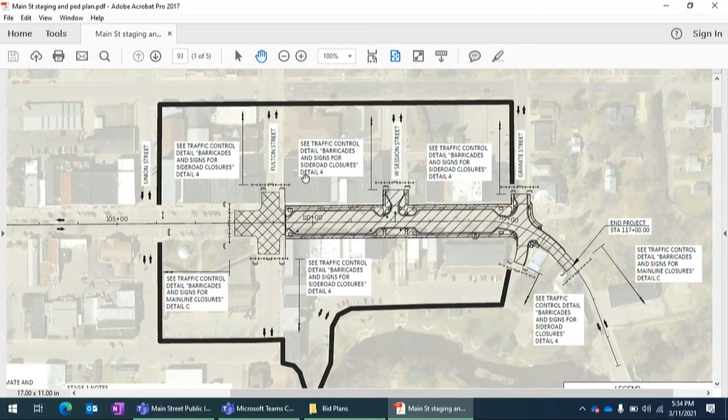Our goal is to have that north side of the project finished up around the middle of July. And then at that point, we would get into the second stage, the south stage of the project.

All these gentlemen will be heavily involved with this project and all the work that goes on with it. Their contact information will be put on the City of Waupaca website. For roadway items, issues, and sidewalks, your primary contact will be Blake. For sewer and water, your primary contact will be myself and/or Roger Hansen.

The schedule that Adam just briefly went through will also be put on our website for distribution. If you have comments on specifics, send them our way and we'll answer them the best we can.

This project -- right now Main Street is an asphalt road. When this is done, it's going to be a concrete road. We'll have concrete roadway, concrete curb and gutter, and concrete sidewalk. And with concrete work, it has to be saw cut -- that's how it's done, that's where the joints are. So there'll be a lot of concrete sawing late into the evening.

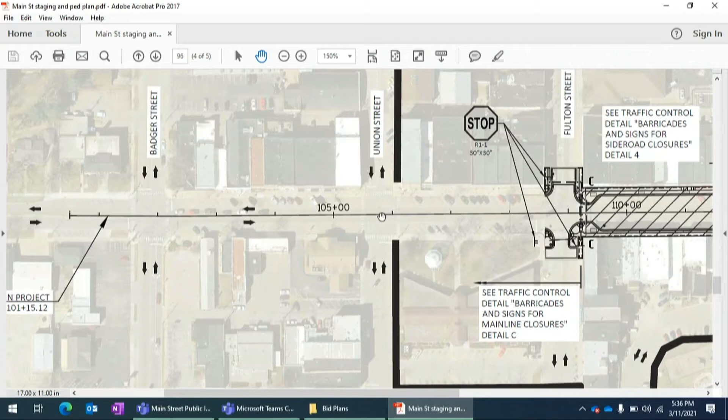One thing to note is the intersection of Fulton Street and Main Street. The traffic signals there will be removed with the project and put into a four-way stop configuration. With the staging of Fulton Street, the signals will initially be put into a red flash, and then eventually those signals will go away and it'll be controlled by just stop signs.

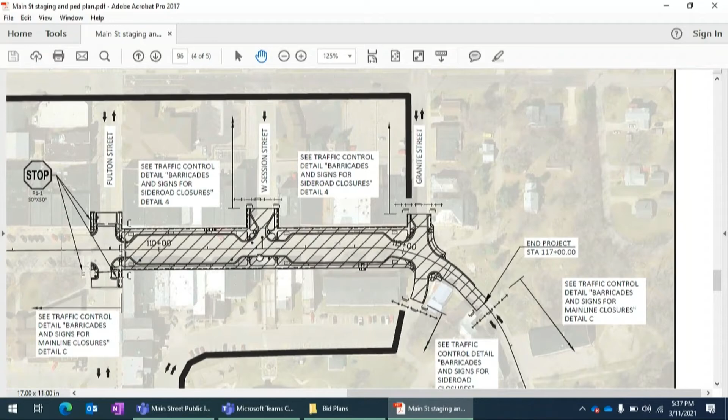The Granite Street intersection, when that is opened up and we switch over to stage 2, that intersection will be a four-way stop sign controlled intersection. So those are all traffic changes that are occurring downtown.

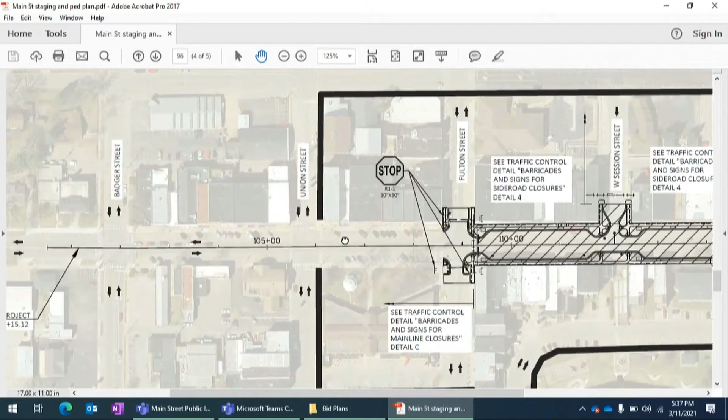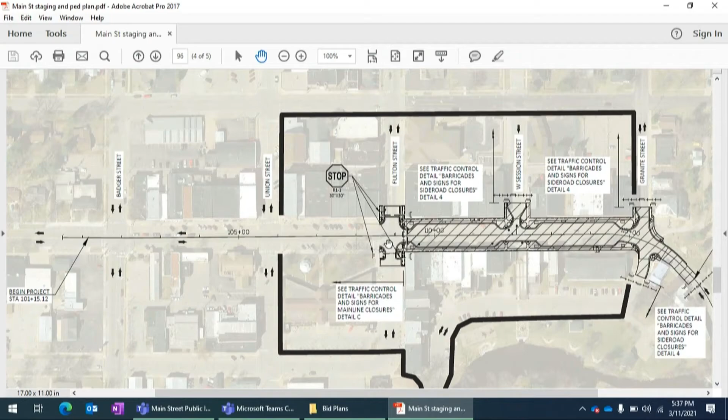The existing street lights out there will be removed early on in the project or de-energized, making it a little bit dark downtown. We are working with WPS to try and get some temporary lighting or to increase the lighting while the existing ones are offline. That's something we're working on and hope to have in place before this project starts.

We will be trying to have another meeting similar to this, probably right before stage 2, which is anticipated to be about mid-July, the stage switch. So a few weeks before that, we'll have a similar meeting to go through the next stage. The amount and type of work in the next stage is similar to this one, but we'll update everybody on where we're at schedule-wise. So you'll be looking for something probably around the 4th of July holiday. We'll get a notification out, but just wanted to make everybody aware there will be another one of these coming.

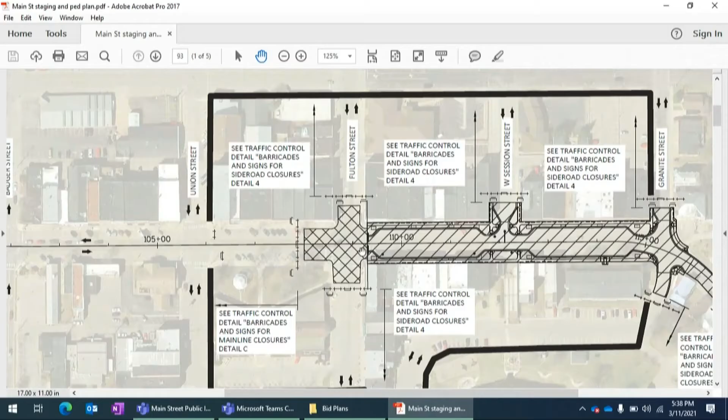Justin, do you want to rehash the timeline we talked about earlier today? The confirmed start date was March 29th. We talked about the Fulton Street intersection being done the first 3 days, then moving north, back to Fulton Street, then back to the south. So starting March 29th, the Fulton Street intersection, this area that's double hashed, will be shut down for 3 days.

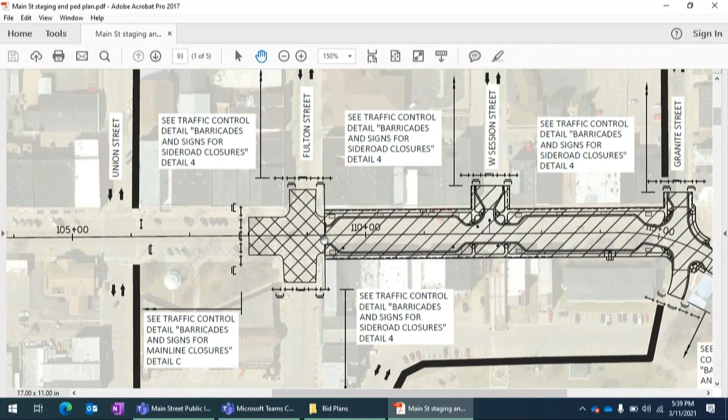Gerke needs to do a little bit of utility work in there before we can switch over and head up north. So this intersection, Fulton and Main, will be completely shut down March 29th, 30th, and 31st. After those 3 days, Fulton Street will reopen with some temporary asphalt, which means it will be a little rougher than usual. Our downtown's a little rough anyway, so it shouldn't be a big deal.

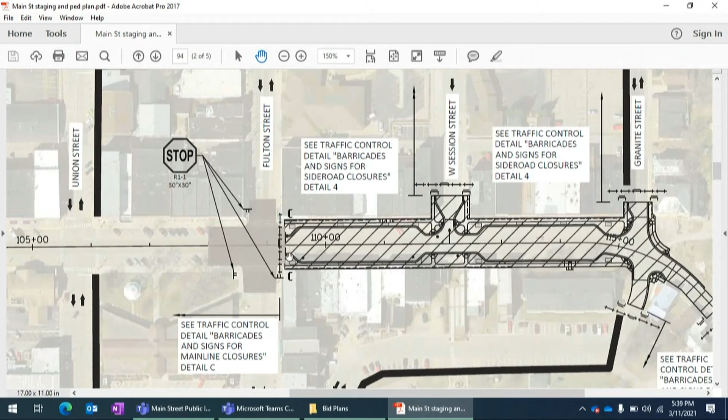But the primary amount of work is going to be north of Fulton Street. It won't be until later, I don't remember the exact date, when we come back to that end of April. Is that correct, Adam? Roughly the middle of May, and then we would close it again.

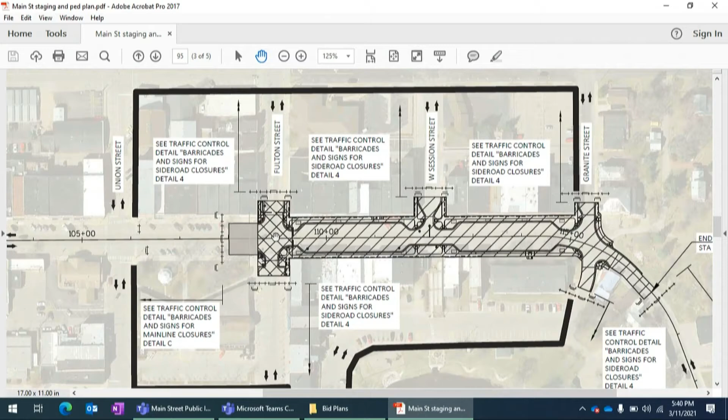Close again like May 17th, and then get it opened up, kind of see how things go on that. So right now we're planning for late April into early May.

The Fulton Street intersection will be shut down fully once again, and that will be to bring all those items back to a brand-new roadway. That's going to take approximately 3 weeks to finish this section, with brand-new curb, brand-new sidewalk, brand-new pavement, and brand-new utilities underneath. 3 weeks to bring that up, then open Fulton Street up and finish our work north of that.

That will continue until mid-July, at which point, as Eric mentioned, we'll do another meeting with more updates. We expect everything north of Fulton Street, including Fulton Street, to be finished by mid-July, and then we'll flip over and start reconstructing south of the Fulton Street intersection down through Badger Street. The Badger Street intersection will be completely closed.

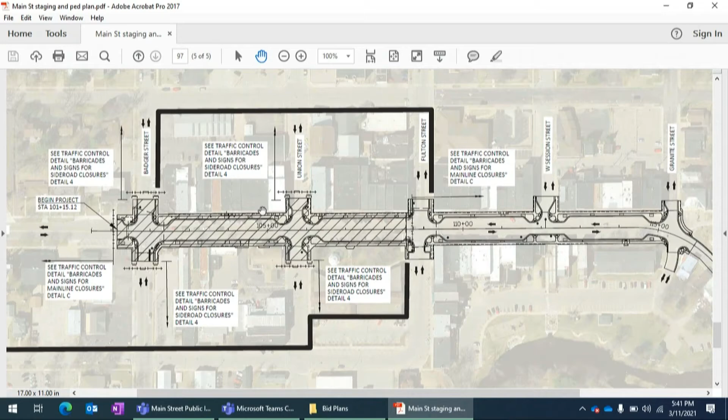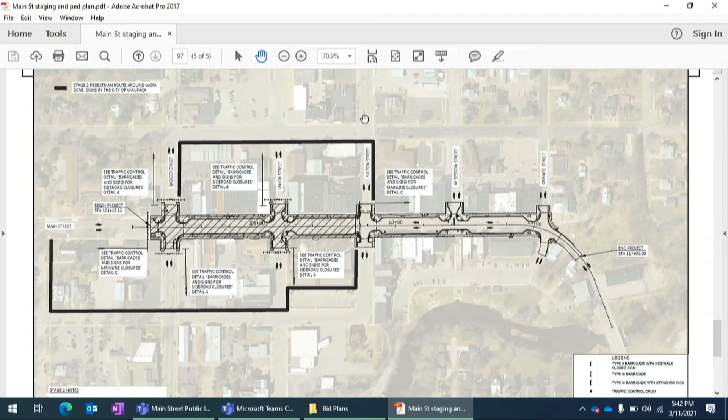The Union Street intersection will be completely closed as well. Traffic around will follow these black lines on our plan sheets, which show the pedestrian route around. Traffic can mainly take Washington Street around in either direction, depending on which stage. That's the primary route for vehicle traffic around, using Washington Street.

Another comment is that right now, this is what the contractor's thinking and how they want to construct this. Weather plays a huge role in this schedule. If we have a good spring without a month's worth of solid rain, things will keep on schedule. We'll keep everybody up to date as we go.

If stuff starts getting delayed due to weather, the city will have to update the schedule as we go. The contractor will be doing that for us anyway, so we'll keep everybody in the loop. But these are what we're shooting for. I want to make everybody aware that weather plays a big role, especially when we start doing concrete paving and underground work. It sounds like the water table is pretty low here, which is a huge benefit to make sure our sewer work can get done in a timely fashion.

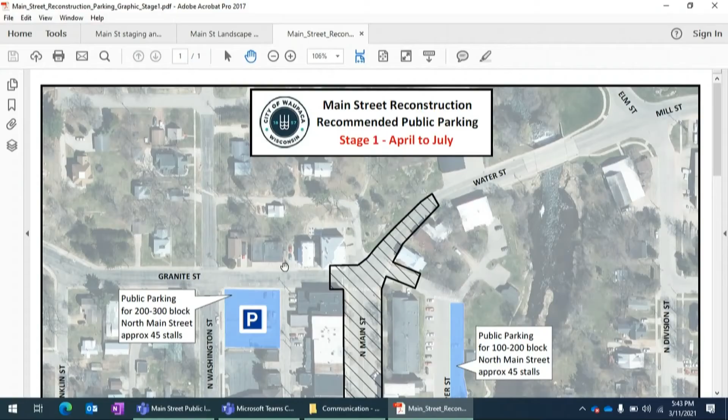So when this is going on, obviously parking on the street will not be allowed. We're going to try and keep pedestrian access there as long as possible. Obviously, there's going to be some elements of the construction that will be difficult for pedestrians to walk through or traverse. The sidewalk we're going to try and maintain as long as we can. When a square of sidewalk gets popped out, it will be replaced with at least temporary gravel.

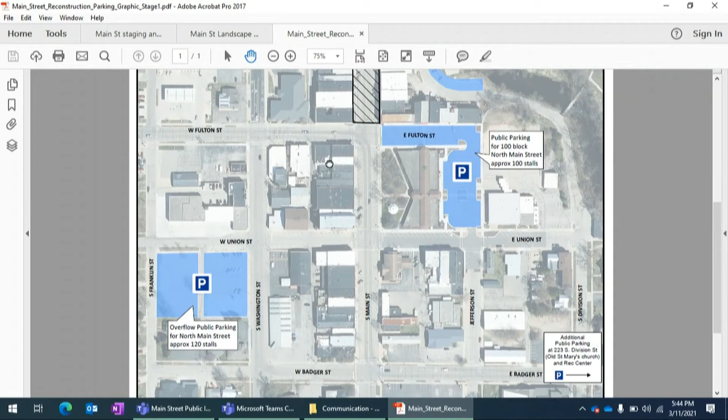With that, we've identified our parking lots that are near the facility. This map here is published on our website as well. We're encouraging people who want to visit North Main Street businesses, or if they live there, to use the Granite Street parking lot. There's also the Cooper Street parking lot on the east side of Main Street. We have the back parking lot behind City Hall, and of course a large parking lot over by the police department.

So for phase one, or stage one, we're recommending using Granite Street and Cooper Street. For stage two, it's flip-flopped: using the parking lot down by the police department and also the parking lot around City Hall.

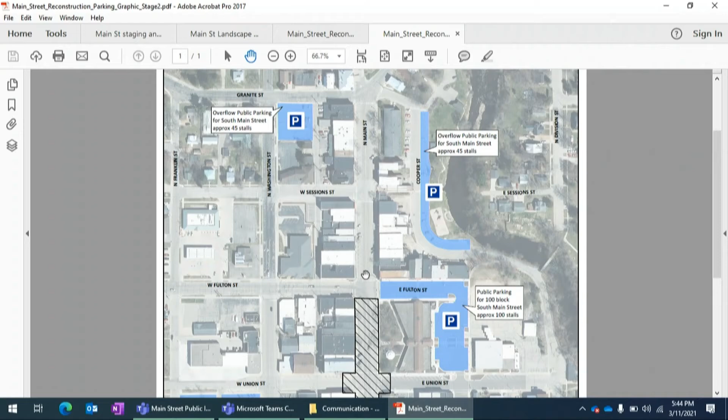Justin, I think you kind of touched on this, but we have a question in the chat: will tenants have access to buildings at all times on Main Street doorways? Can you speak to that more specifically? Not 100%, but we're going to try our best. There'll be times when there's excavation work right in front of that doorway. Maybe Adam, you can expand on that a bit more.

There should be access most of the time. I guess the times I see we might have issues is when we're running the water and sewer laterals, depending on where those enter the building — we might have to open that up.

There'll also be a period when the sidewalks are removed before we get some base back in there, and that might be hard to get in and out for a short time. And then there'll be the pouring of the concrete itself right in front of the door. In the first stage, with that being in June or July, you're talking 5 to 6 hours where you can't walk before you can walk on that concrete again.

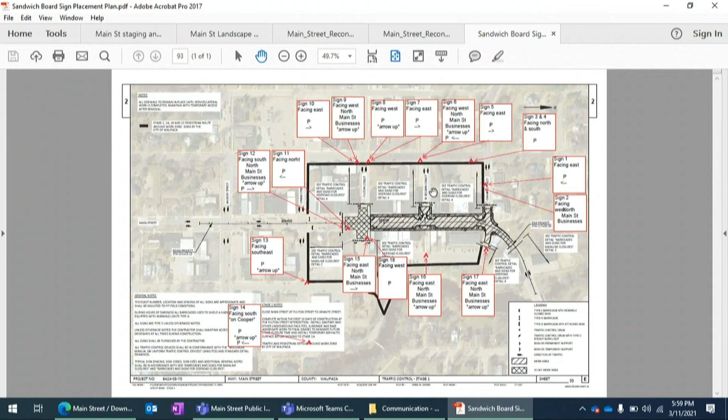We had mentioned this detour route or signage going to and from the businesses. This is something we created, a mixture of the DOT plans plus city plans. This is a little more complicated than what most people need to see, but what it shows is we're going to have these sandwich boards out there with signs that point out which way you should be going, whether you're trying to find a place to park or a place to walk. This is it in a nutshell.

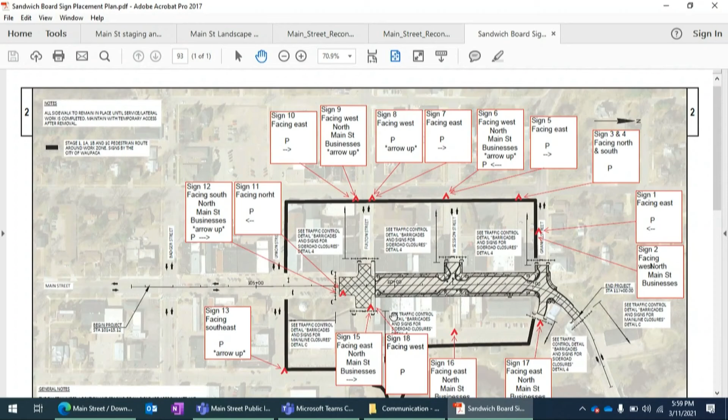Those are the details of that detour and parking around the construction zone. So I do have another question here. Can you please review the 3-week closing of Fulton in May?

The 3-week closing, we're calling stage 1B, right, gentlemen? Correct. Yeah.

We would need to close the Fulton Street intersection again around the middle of May to finish the storm sewer removal and replacement, the water main removal and replacement, and then the grading work, and all the new concrete would get installed during that closure. The initial closure in March is needed just to tie in the sanitary sewer to keep the sewer working through that whole time while we work on the north part. That's the reason for the 2 separate closures.